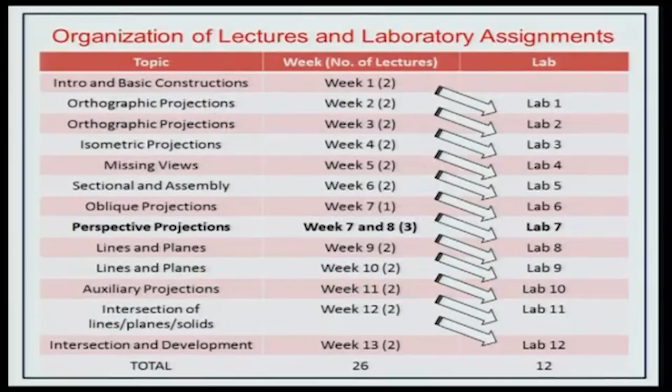So, a little more on perspective views. This is an example that you're going to be solving in your lab. So, I just want to go through the solution once. There are going to be a lot of lines in here, so bear with me. I'll try to do my best to explain things. All right, so what's given to you is the plan view of the object and the profile view of the object and a bunch of lines.

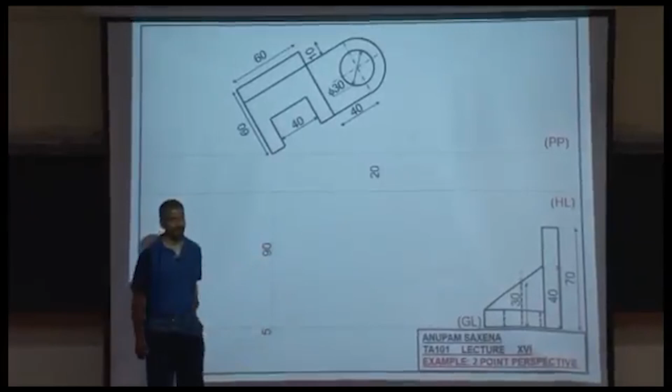So, you have the picture plane PP, which is passing through one of the edges of the object. 20 millimeters below that you have the horizon line. About 90 millimeters below this vertex of the object you have the ground line, over which you have the profile view. This is where you are standing and this is where your eye level is, and 5 millimeters below the ground line you have the station point. So, these things are given to you. Once these things are given to you, you can think about starting to draw perspective views.

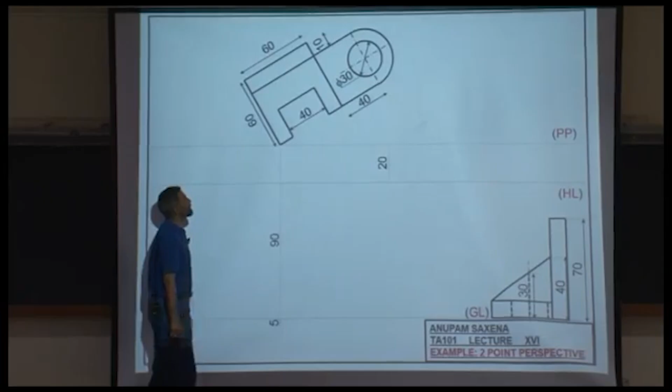Now, about this angle and this angle, of course, this angle is 90 degrees. So, you get a nice perspective if you keep this combination as 60-30. So, maybe around 30 degrees if this length is more, otherwise 60 degrees, and the other angle as 60 degrees or 30 degrees depending. It's a nice idea because you get a very nice perspective of that. All right. So, you have seen this. This is the isometric view of the same object that you have drawn in one of your previous labs. I am going to be keeping this picture.

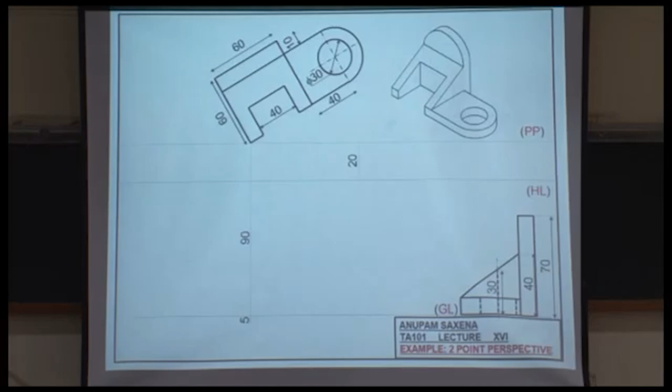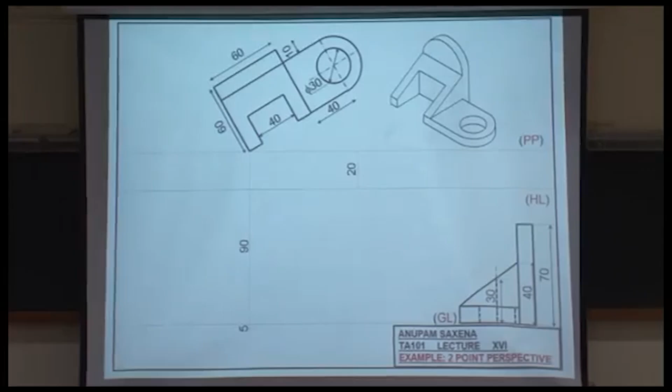There is a slight modification, or simplification, that I am going to be working with. I have replaced this part with a rectangle, a rectangular region or block, so that we can understand the drawing of perspective a little better. Otherwise this thing would remain the same. So this is a rectangular block, but this part remains the same.

What I want you to do is try to understand the difference between the isometric drawing and the perspective drawing as we continue with the drawing.

So this is where the station point is. I am letting go of the numbers, and I'll stay here so I can also look at these slides, the lines. Am I blocking your view? Can you move, maybe to the back? Let go of the numbers.

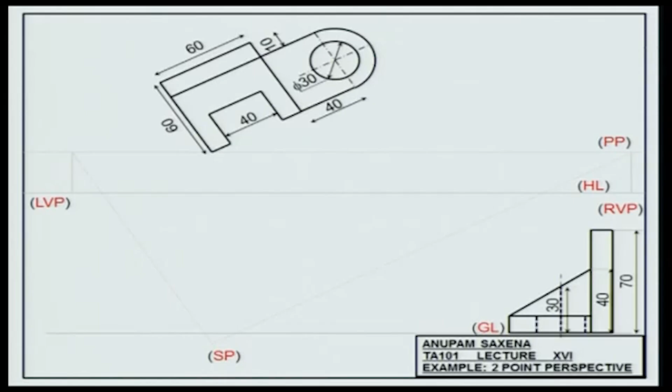First step is to figure out the left vanishing point and the right vanishing point - this for the left, this for the right. You project the edge of an object far away along this direction onto the horizon. This is your left vanishing point, LVP, and the right vanishing point on the right.

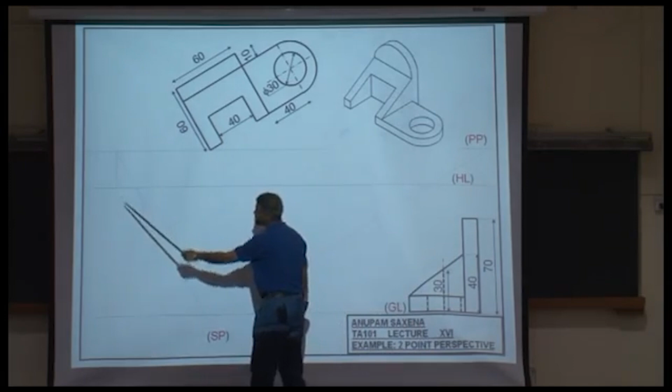Starting from the station point, look along this direction at an object at infinity. Get the image of that on the picture plane, which is a point, and project that onto the horizon line. This would be the left vanishing point. Likewise, on the right, look along this direction at an object at infinity, get the image of that object as a point, project it downward onto the horizon line, and you get the right vanishing point.

First step. With me? Good.

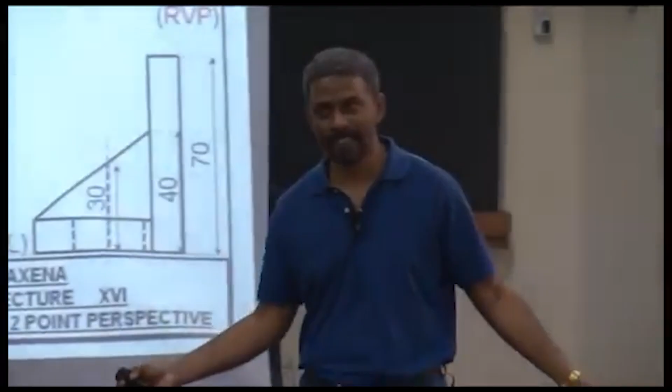Now what are the three rules? Lines which are parallel to the picture plane remain parallel. Lines which are not parallel to the picture plane vanish. Lines which are on the picture plane...

...stay in true length. Identify - the first step is to identify the edge on the object which is on the picture plane. Look at this vertex here, this point. So the edge going into the screen will be the edge which is in true length.

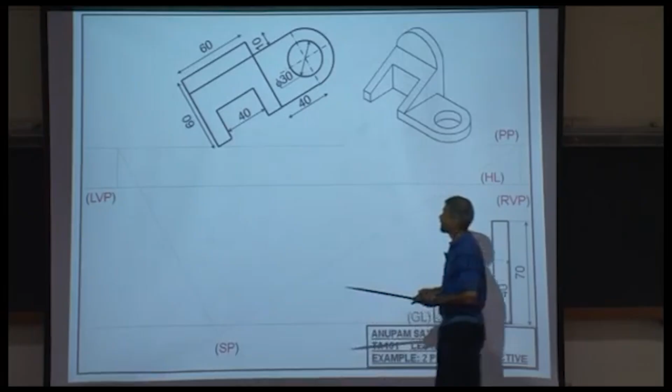Once you have identified that, from the station point, view that edge. That edge would correspond to this here. Make that edge. Now, with that edge made...

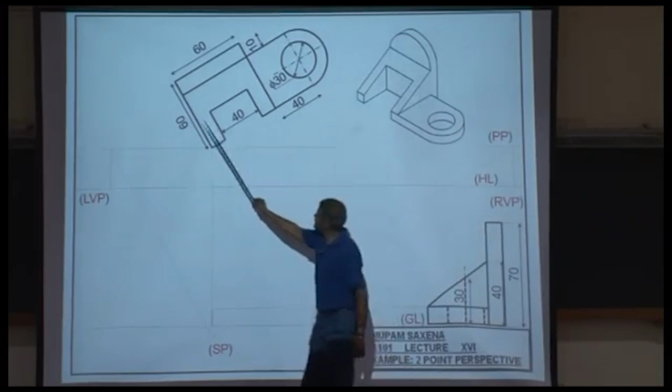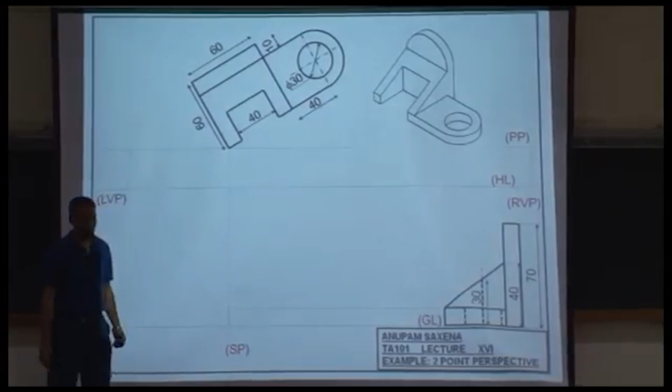...these edges are going to be vanishing towards the left vanishing point, and these edges are going to be vanishing towards the right vanishing point. Left vanishing point, the right vanishing point.

Let's focus on this edge. From the station point in the top view, get the sight information. The image of this vertex will be formed over here, projected downward. You will get the edge in between these two rays that vanish towards the right vanishing point. With me? Okay.

So once you have this edge, you can get this block made pretty easily.

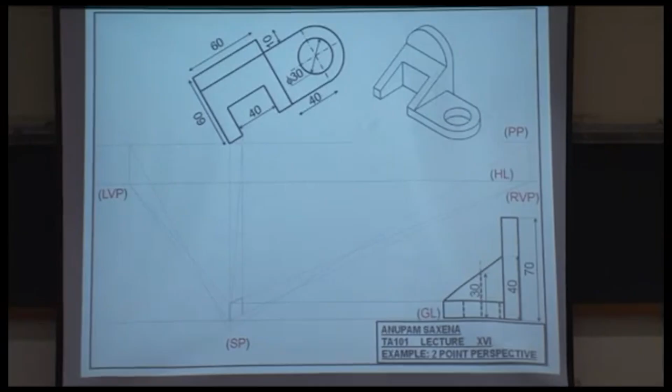Now, of course, you won't see this edge because it's not there, but how about this? You see this? Where would you see that? On these two rays.

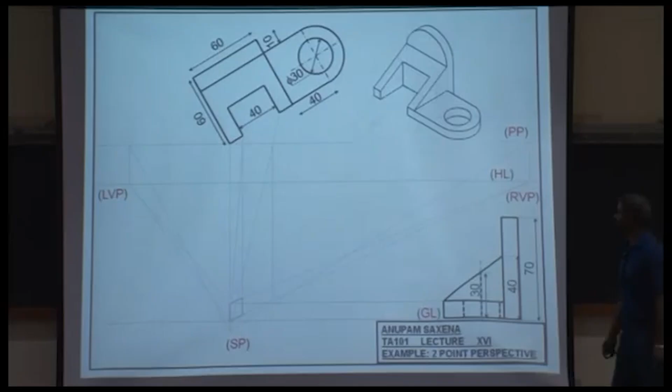What do you do? From the station point, look at this vertex. Get the image of this vertex on the picture plane. Project that image down, and you'll get this edge here, right in between these two rays.

The same thing for this vertex here - get the image on the picture plane, project it down, and you see this. With me? Okay. Straightforward? So you have this part.

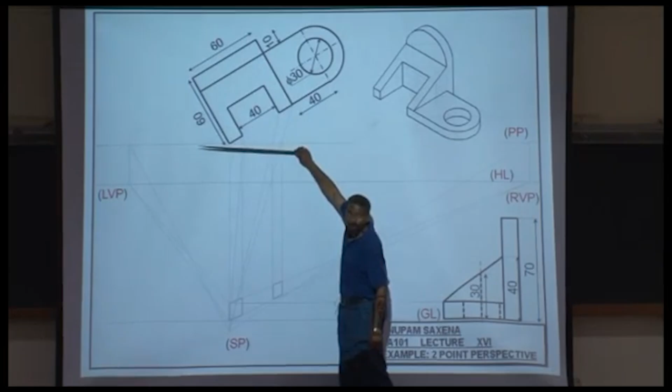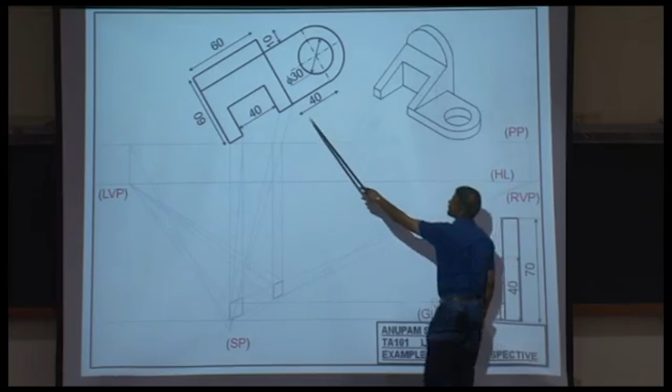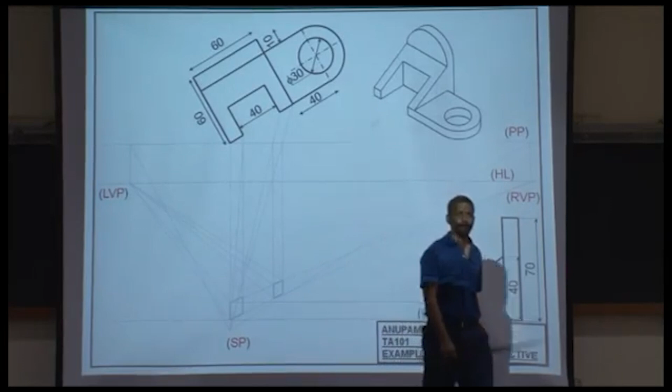Now this is the important part. This guy here in the profile view, where is it? Where is that in the plan view? Over here? Right. Now, would any part of this be on the picture plane? No. Will you be able to get the true height of that?

Will you be able to get the true height of that? Probably not. Okay, but there is a little trick that you can use to get the true height of that.

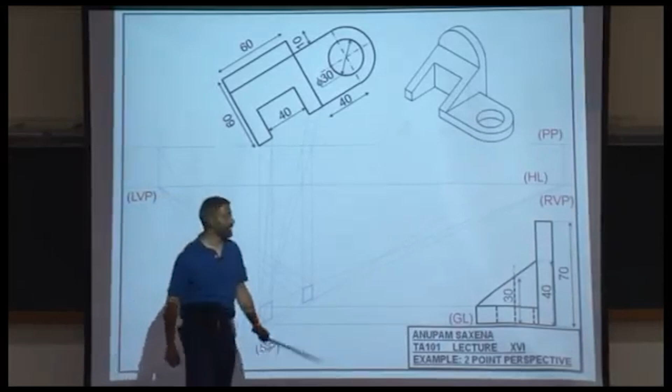So you can just imagine that this guy comes down over here, so that one of the vertices of this guy is on the picture plane. Correspondingly, get the height of this thing on this line, because it's this line where you're going to be getting all heights in true lengths, yeah? Okay, so imagine that this guy has come down over here.

Imagine that this guy has come down over here so that this vertex is coinciding with this vertex. Okay, working? I'll try to speak without the mic for a while. Can you hear me? Good. So, are you with me so far with regard to this?

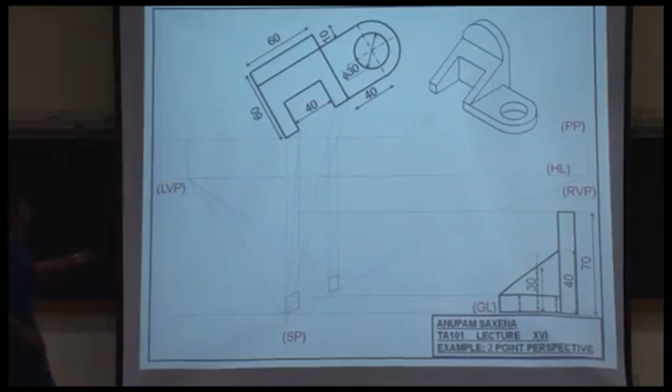Now look at this edge. Where's it going to vanish? There? Okay, what do I need to do now? I use the sight information. I look at the back vertex of the object in top view, get the image of that on the picture plane, project it down.

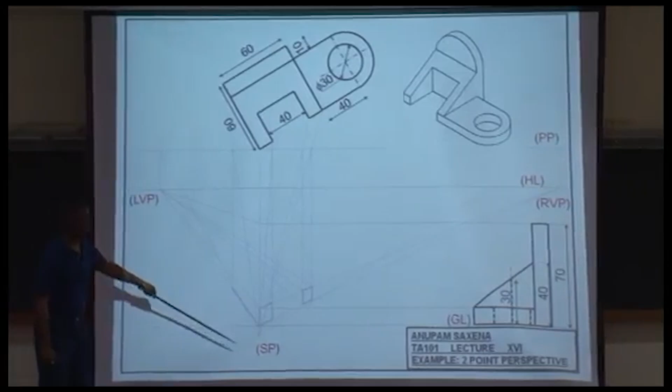What this edge is, that's this edge in perspective. Okay? How about the height? Are you with me on this?

So get this height. So let me go back. So what I've done is a little trick. I know that if I stay on this vertical line, I'm going to be getting true lengths.

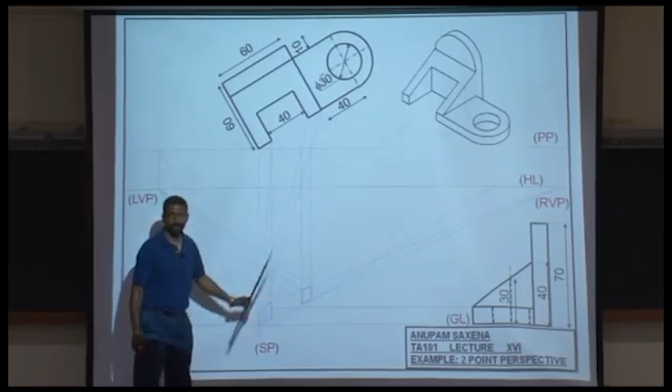Okay, can I have some? Kurkure? You know, it's bad, you should share, nah?

All right, so what I do is I'll do a little trick. I know that anything on this line I'll get in true length. So I'll move this feature over here so that one of these vertices coincides with this vertex.

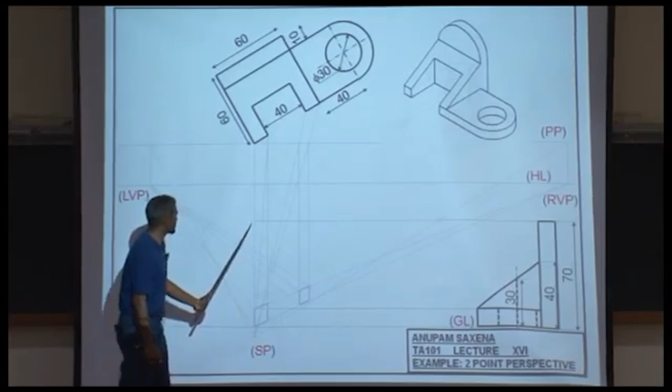So that means that if I use the profile view and get the height over here, what I can do is, knowing that it is going to be vanishing at the left vanishing point, I draw this ray, and then I use the sight information, look at the back vertex, get the image, project it downwards. This would be the edge in perspective corresponding to this edge, and this would be the height in perspective corresponding to this height. So far so good?

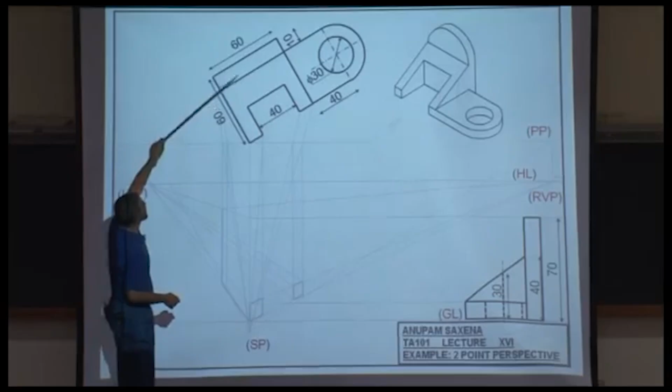Okay, I look at the second vertex, get the image, project it down. Then looking at these edges, I know that they will vanish towards the right vanishing point, both of them. And if I look at these two vertices, essentially I'm going to be using the site information. I go up, get the image of that vertex on the picture plane, project it down. Likewise, this one, project it down. I'll get this block which corresponds to this guy over here. Fine? So far so good?

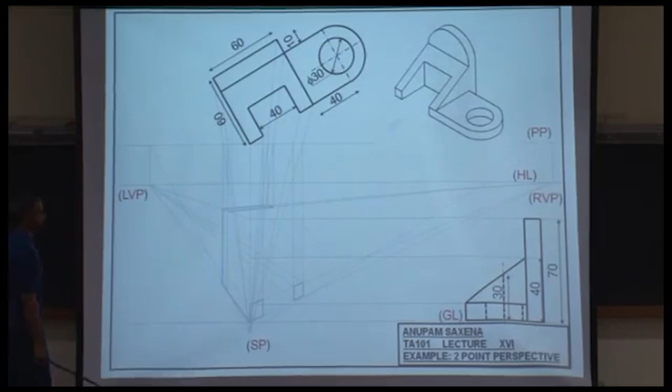Same trick. Same trick to get this part of the object. Use the profile view. Project the height on the true length line. Draw rays that vanish towards the left vanishing point and the right vanishing point. So this is the height that I'm going to be getting here. This is the slant part of the surface that I get. I get this height, I get this slant part.

Not good. Huh? Okay, so far? Or maybe I can go back and I can explain? No? Stay with me here. You know, it's not your fault because even I'm getting confused. Stay with me.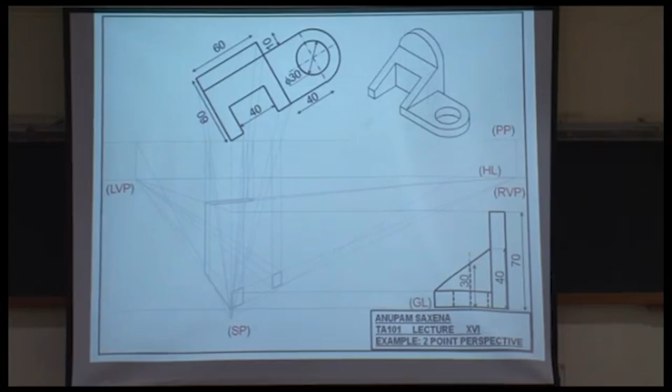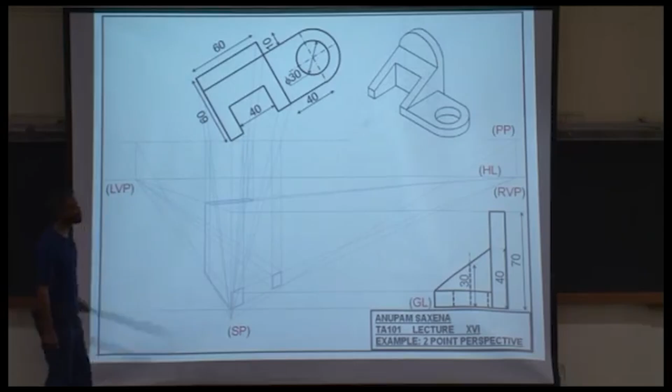Do I have this point on in my perspective figure? Do I have this point in my perspective figure? Do I? Where is that? This guy over here. I don't have it, nah? How do I get it? I know that this point corresponds to this point, right?

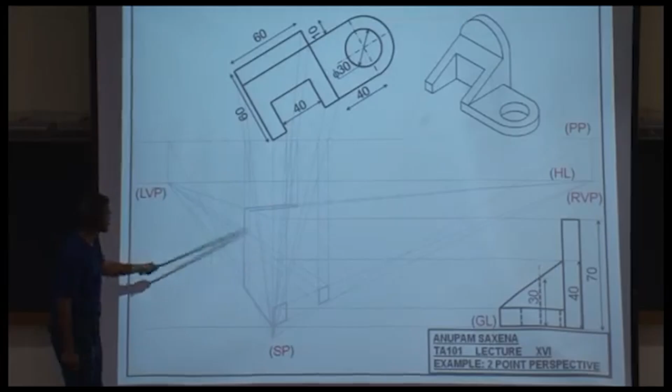I use the true height information. Take this ray towards the left vanishing point. This intersection point, is that right? This one over here would correspond to this and this, okay?

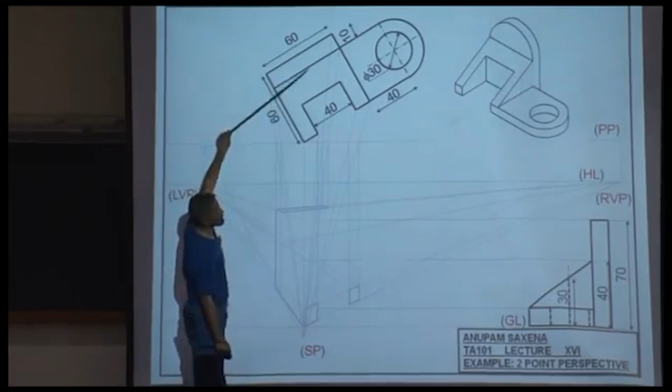So once I have this intersection point ready, I look at this edge over here. This edge would vanish towards the right vanishing point. Having done that, I can draw this edge, this vertical edge, and the vertical edge on the right here. And then I can join this and this point to get the slant surface. Good?

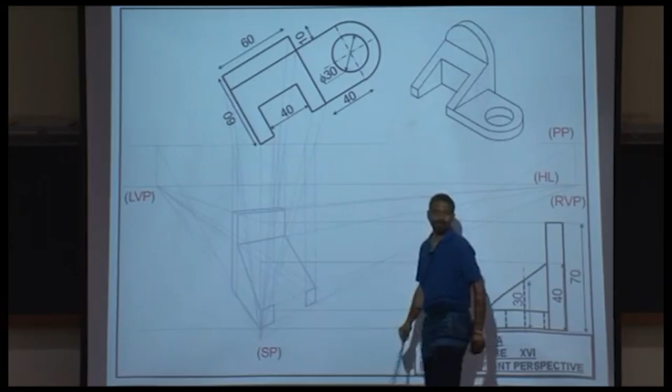How do I get these 2 points? Stay with me. I've gotten this edge now. I've gotten this edge. So there's a trick that I can use. What I can do is I can project these 2 edges, right? Once again, I can project these 2 edges onto this edge.

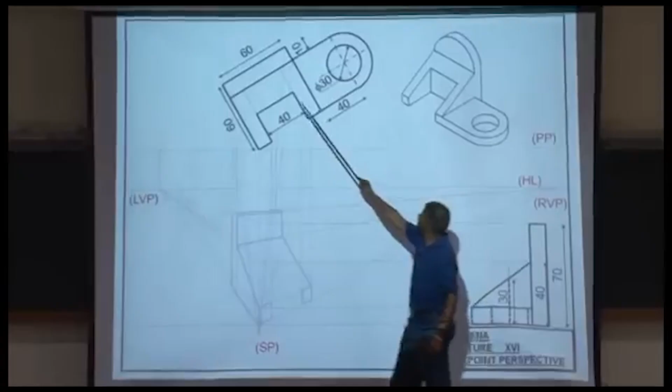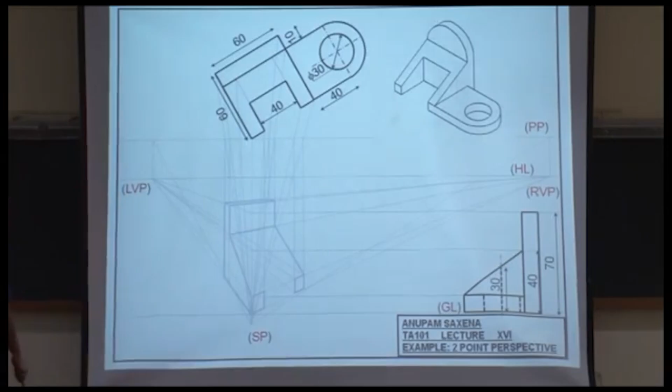I get these 2 points over here. I look at one of those points from the SP in the top view, get the image. So this point over here comes down over here, right? Okay, likewise, I look at this point.

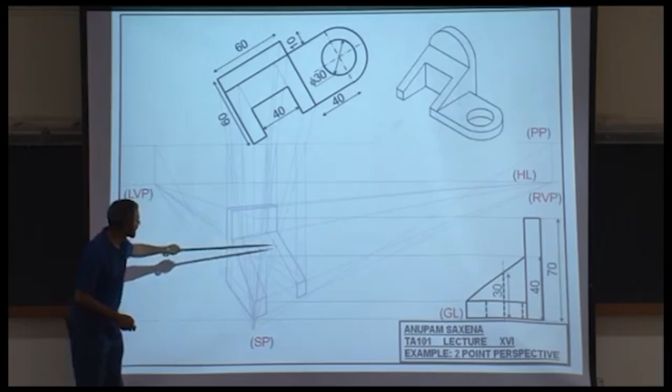I look at this point from the station point. This is the image of that point on the picture plane. I project it down over here, and then I join these two points, and I get these two red lines corresponding to these lines over here and over here.

Fine? With me? Which horizontal line? There are many horizontal lines. There are so many lines, yeah, come over.

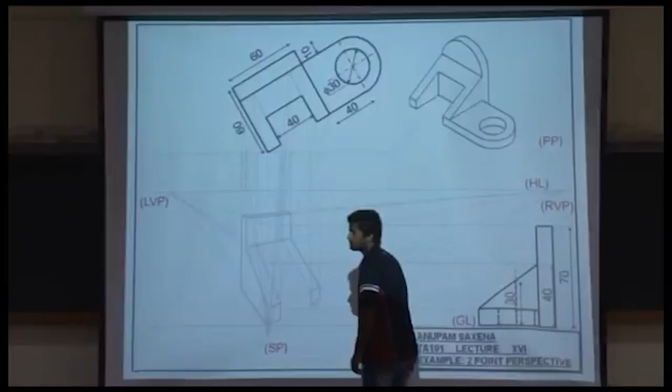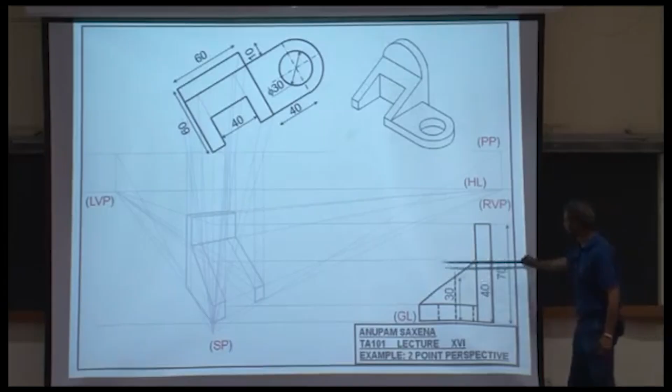No. No. You know why? Why? Absolutely. So this portion cannot be here because this portion is behind the picture plane.

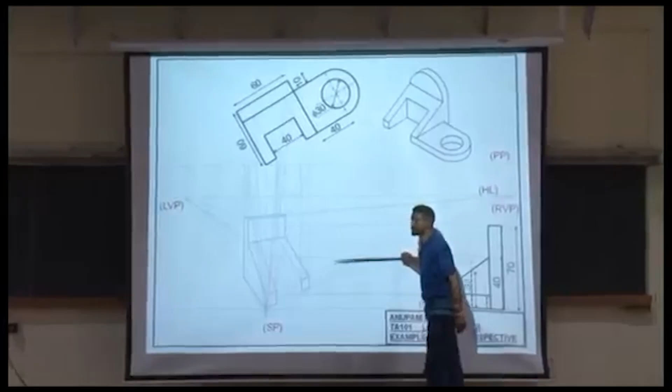Okay, so this horizontal line here is just to take the true dimension of this on this true length line. All right, so stay with me. This is confusing, there'll be a lot many lines.

All right, now I'm looking at this point. I'm looking at this point here. I'm going to be taking the projection of the image of this point from here, which is this here. I know that this edge vanishes towards the right vanishing point.

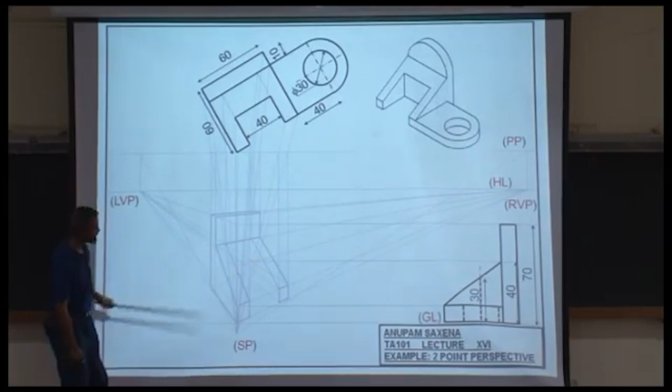I draw this edge, and the intersection of this ray with these two edges will give me this edge, right? Can I repeat? Okay, so far? So what I've done is I have located these two edges in perspective.

Fine? I have to locate this point and this point. Okay, how do I do that? I go to my station point, which is where I am. I look at this point, get its image on the picture plane, project it down. On this edge.

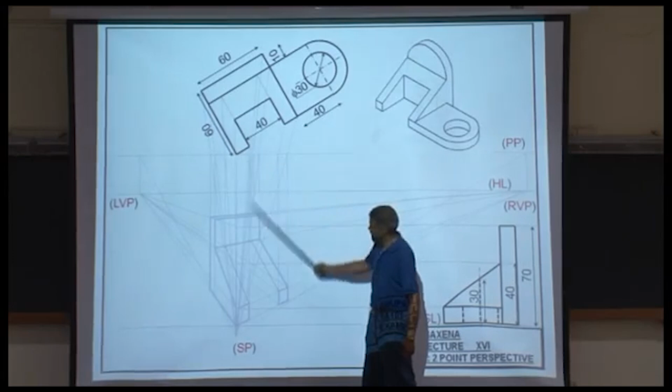Okay, I'll get this point over here. Likewise, I look at this point, get the image on the picture plane, project it down, I'll get some point over here. But I don't need to worry about that because I already know that this edge is vanishing towards the right vanishing point. So all I need to do is draw a ray from this intersection, RVP.

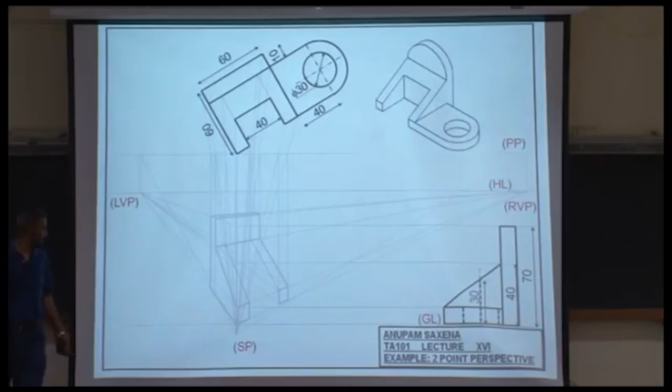Okay, which is what I do here. Fine? Yeah? So we can do it without the red line extensions. Why, of course you can. There are multiple ways of doing that. Of course you can, this is one of the solutions.

Okay, so this part of the object is in perspective now. Needs a clap, come on.

Now, is it possible for you to draw the right hand part right inside the object in perspective? No? Want to see things messed up? Yes? Which one? Why? Stay with me.

So one of your peers says that this object is not complete because there would be a vertical line, and there would be another line, and there would be another line. Three lines missing. Fine, don't worry about that. This is just for check.

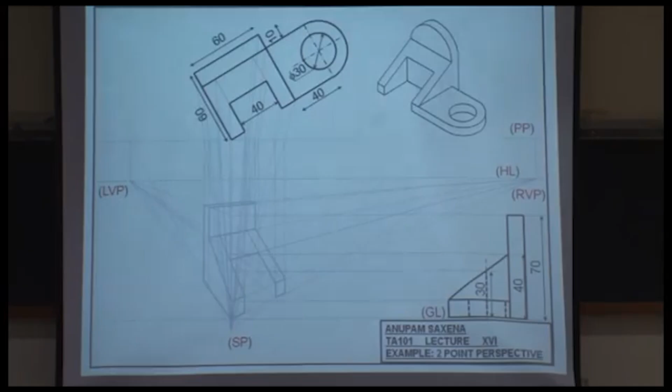This is your vertical line. So in your slides, you can go back and refer to the blue lines. This is just for verification. Don't worry about that, vertical line.

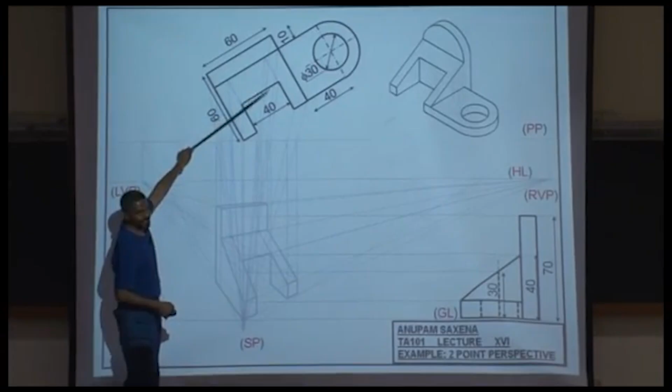That if you draw a ray joining this point and the right vanishing point, the edge below this edge, okay, that lies on that ray, extend that, and then you'll be getting the third line. Okay, all right. So here comes the messy part of the object.

What am I doing here? From this vertex, I am drawing this edge in perspective, right? There you go. And then the edge on top of that.

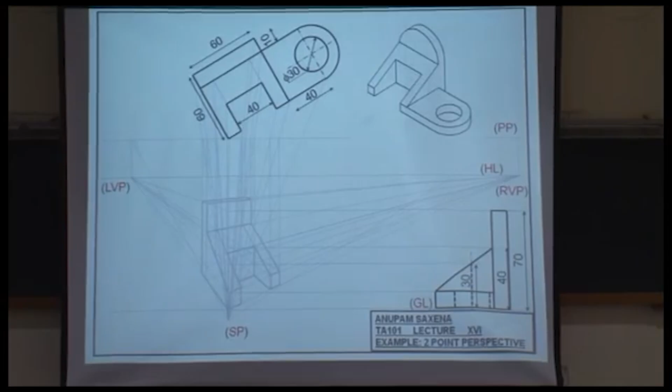It's getting messier. Huh? Not visible.

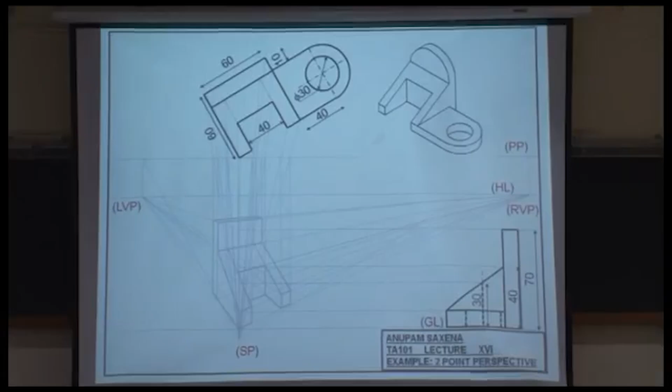You know, it's going to be interesting when you are going to be working on this. It's going to be interesting. It's going to be too many lines. Okay, too many lines. All right.

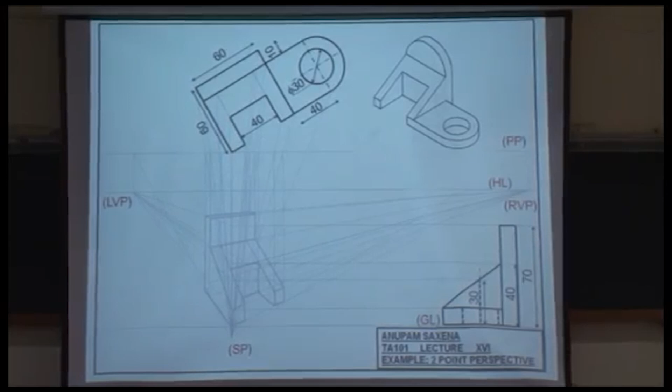Okay, now I want you guys to be attentive and just see what's happening on the right hand side of the object. From the station point, the idea is that if I am able to get a perspective sketch of this portion of the object, I think I'll be okay.

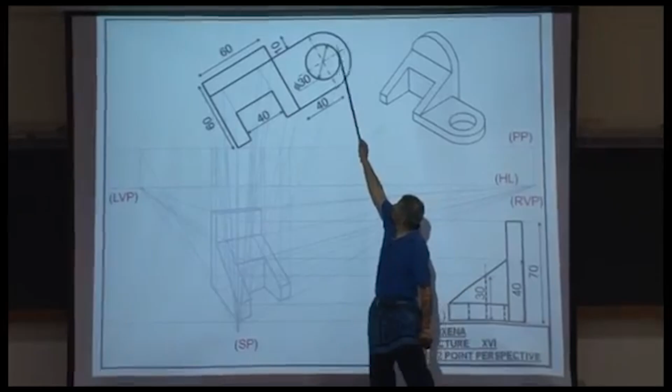So what I'll do is I'll first of all simplify this thing to be like a block. Once I get this like a block, I can then try to get this semicircle and the circle later. So the first thing is for me to get this part of the object as if it were a block. Okay, so let's do that.

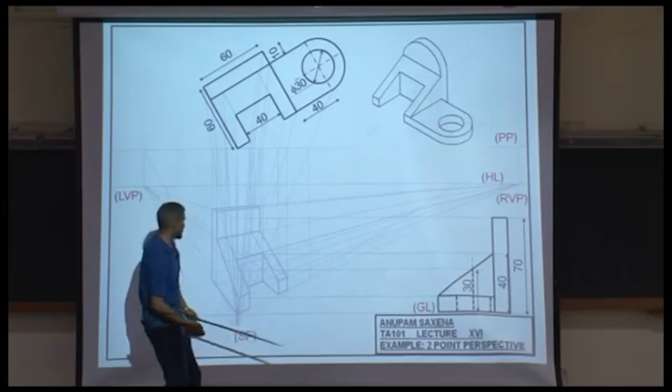I look at this vertex from the station point, project it downwards. Okay, this vertex is going to be lying on this edge. This edge in perspective is this edge right there. Okay, I get this part.

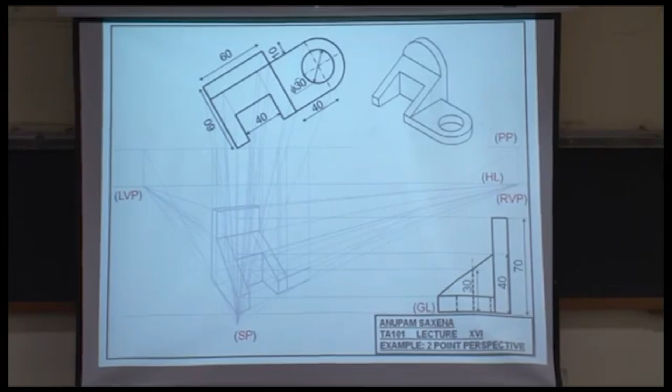Okay, now look at the point at the back. This point over here, okay, this is the intersection point which needs to be projected downwards. This intersection point is what we are interested in.

Okay. And as I said, I am looking at this part as if it were a block. So, I draw 3 blue lines, look at one vertex, okay, take it down, extend it, look at the other, take that projection down, extend that, I get the block, right. So, once I get the block, then getting the circular feature is not going to be difficult. It's going to be messy, all right, but it's not going to be difficult.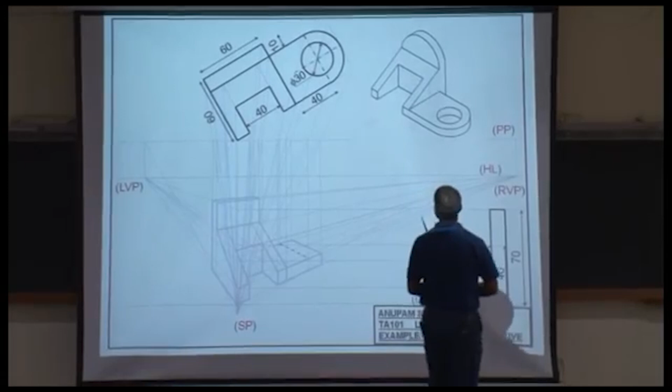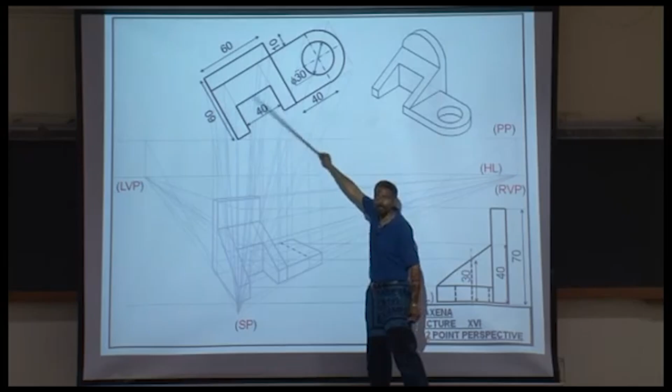This is your center line. Now, what I'm doing here is this. I'm going to be drawing a bunch of lines parallel to this in this region. Okay? So, these lines are going to be intersecting this arc, okay, and I am going to be doing the same treatment to those points of intersections as I have done for all the vertices of the object. Okay? This is what the generic idea is. Wait and watch. Line in the middle, just wait and watch.

Got that line? Getting the points of intersections, I guess. Got that line? Got the center line? Got the arc? Got this part of the arc?

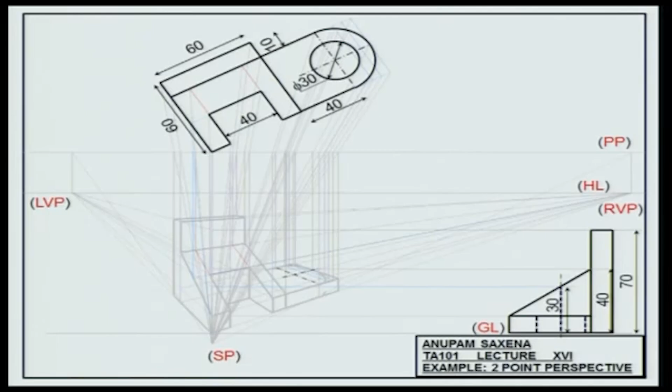One solid line shouldn't be there. Shouldn't be there. Which one is it? This one? Ignore it. Yeah, it shouldn't be there. Okay, there's more mess. It's pertaining to the circle. From where to where? All right, so let me have these guys over here and then maybe I'll explain it.

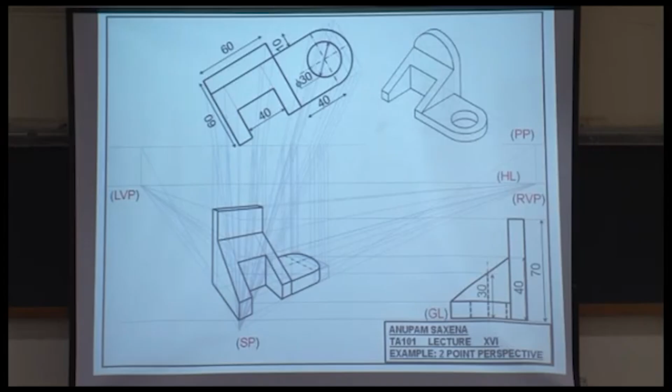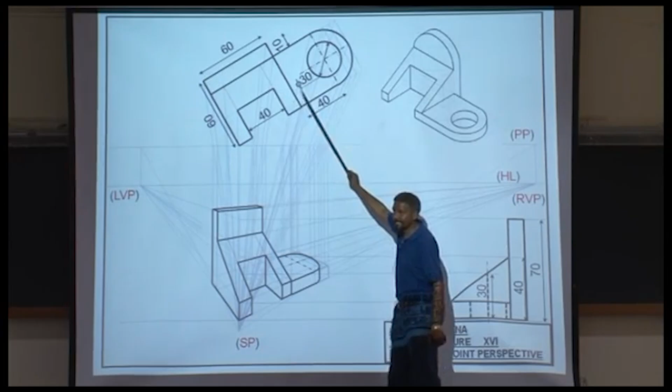Now, this block was fine, huh? This block was fine. What I wanted to do was to get the arc in perspective. Okay. Now, how would I do that? I draw a bunch of lines which are parallel to these lines, get the intersection between this arc and these lines. I will get a bunch of points, a group of points, and I am going to be dealing with those points the same way as I have dealt with all the other points. That is what the basic idea is.

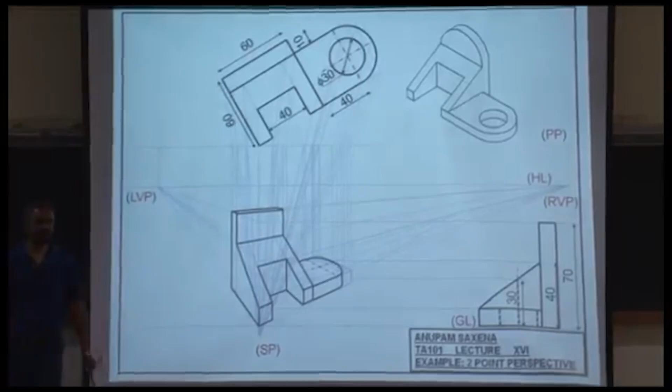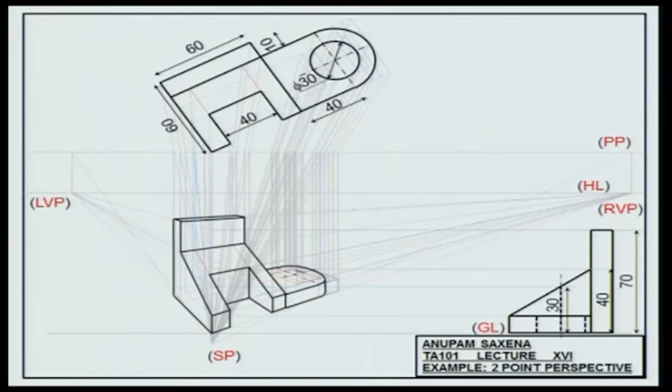Wait and watch the mess pertaining to that circle over there. Again, the same thing. I am going to be enclosing this circle within a box, get the box in perspective, get the intersection points, and eventually get the circle. Wait, just watch. I'm going to run a little fast. Working? All right. Bottom line. Hold on. Come on. Stay with me.

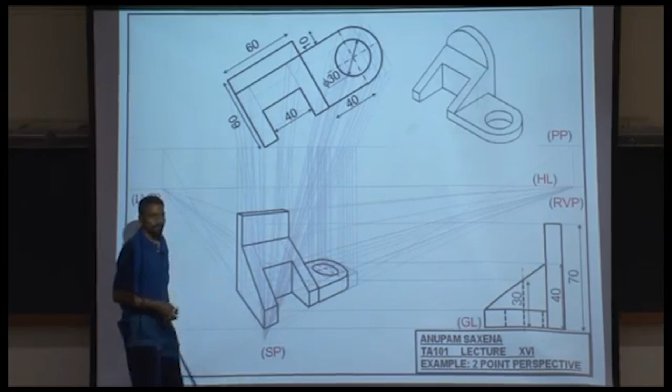Once again, the idea is to enclose this circle within a box, get the box in red over here in perspective. Okay, make that circle intersect with a bunch of parallel lines, get the points of intersection in perspective, draw the corresponding thingy. Okay, and of course there would be an arc over here if you think there would be. Okay, now this is what you should see at the end of your lab 8.

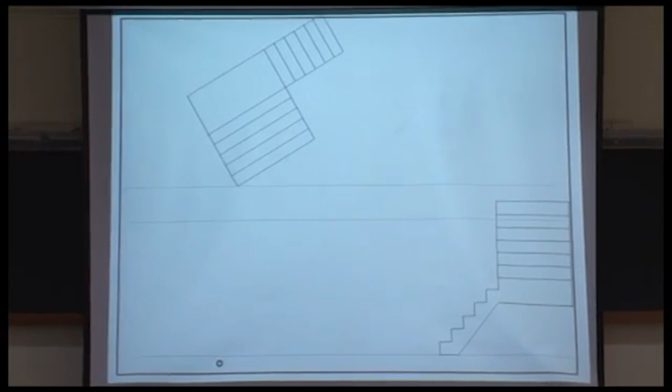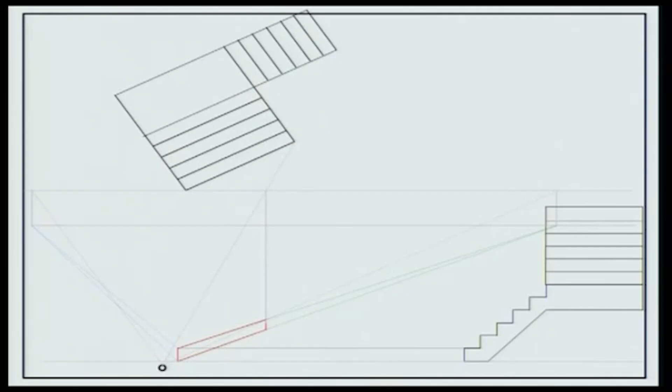Okay, I wanted to cover 3-point perspective, but we don't have much time, and I have to wind things up in another 4.5 minutes. Just an animation of the 2-point perspective of a staircase. Art ain't easy.

So this probably answers your question, huh? So depending on the height of the object you have, if it's below the horizon line, you're going to be seeing the roof of the object. If it's above the horizon line, you'll not be seeing the roof of the object. So this is the horizon line, all these guys are below the horizon line, and that's the reason why you're seeing these flat surfaces. Okay? Above the horizon line, those flat surfaces are gone.

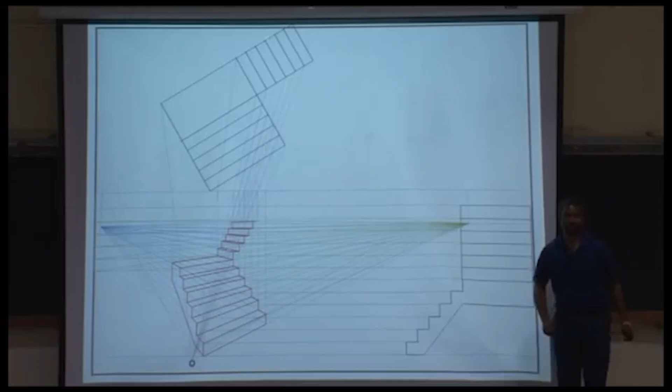So it has been 8 months since you have cleared JEE. 8 months? Yeah, almost? More than that? 10 months. All right, almost 10 months since you have cleared JEE. Okay? Fine.